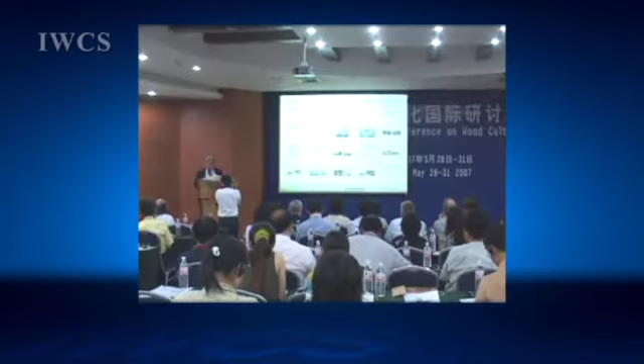It's very important words. My presentation is wood engineering in Japan, past and future. One concept is wood and forest in environmental protection and resources cycle. This is a very important concept for my presentation.

One is how to protect the environment, especially the global environment, now with the greenhouse effect and so on. Another one is renewable resources, meaning sustainable development.

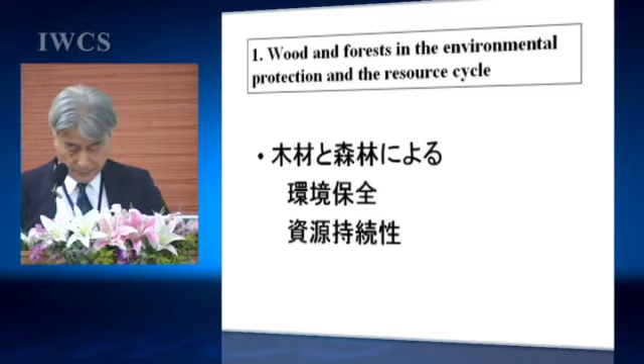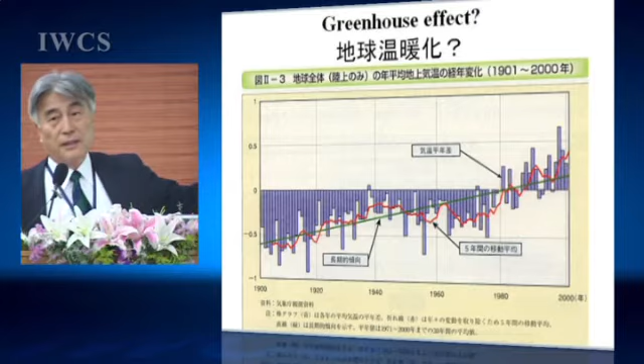Two points are very important. One is, as you know, the greenhouse effect, like this - the temperature on Earth is going up, meaning increasing carbon dioxide. Another important word is decreasing energy resources in the earth.

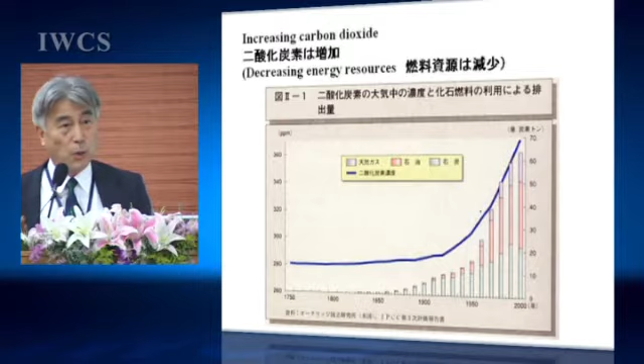So we have three benefits by using wood. One is the carbon storage effect - in forests, in buildings, wooden buildings store carbon. That is forest in the cities - timber structures in cities are urban forests.

The second one, energy conservation effect - timber requires significantly less manufacturing energy, very few, sometimes 10 times or 20 times, sometimes 100 times less. Other materials use a lot of energy. The third one is the alternative energy effect - as you know, timber can be used as fuel, incineration of material. So we have 3 effects, 3 benefits from using wood and timber.

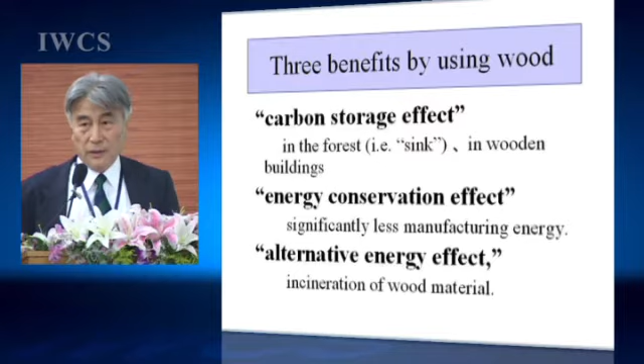Another important point is carbon stock. Timber includes carbon - photosynthesis creates carbon stock. So if we use timber structures, the stock is bigger than the carbon release.

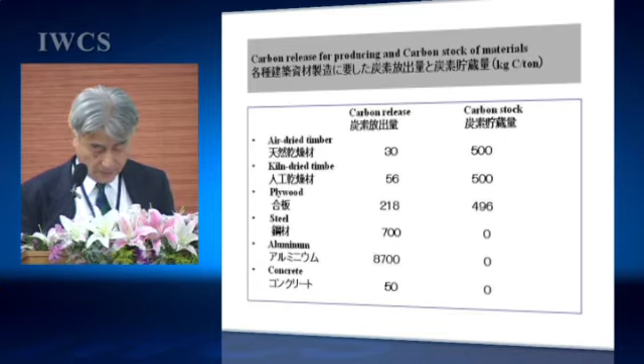This means another forest in urban areas. After demolishing houses, this carbon stock can be used for fuel, sometimes as materials for particle board and fiber board and so on. That is a very important factor. Using wood leads to producing resources - we use forest timber, cut it, build houses or furniture, then demolish, recycle, and finally burn it back to the forest.

But in the forest, new trees get sunshine to become newly renewable resources. Other materials, like steel or minerals, only release - they don't regenerate.

So we say this circle is a very large circle - meaning producing resources, including producing resources. Recycling is also very important, but in a recycling system there's no new production of resources. This is a very important difference between timber and other materials.

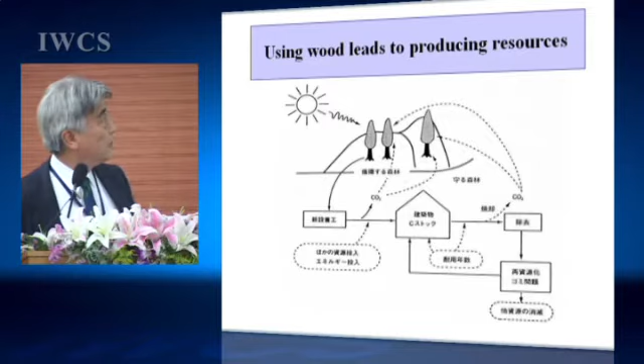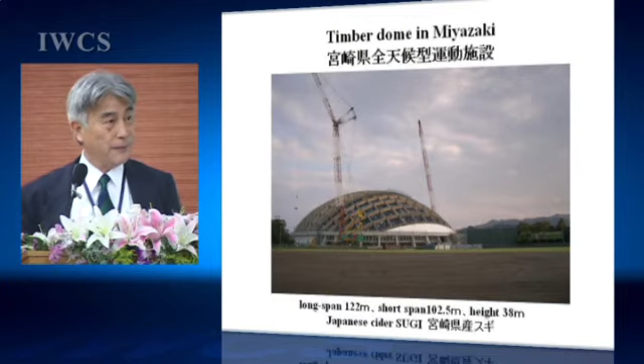This is made of timber structure. The specific gravity of the wood is about 0.35 - very light. This timber dome used lamina, about 2,000 cubic meters. It stocks carbon, about 233 tons of carbon.

Using the energies, if we use this timber structure compared to a steel structure - I think this uses about half the energy of a steel structure. In this dome, this position, this joint, is made of steel, and this one is glulam. If it were a steel construction of the same weight, maybe 10 times the energy would be used.

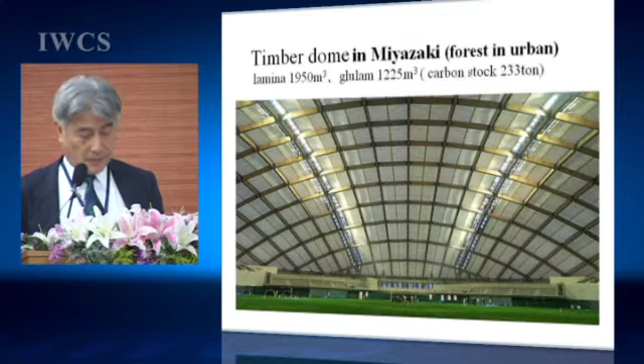So this one is 10, if steel construction would be 10 and 10 - so that is half. It's half the energy used.

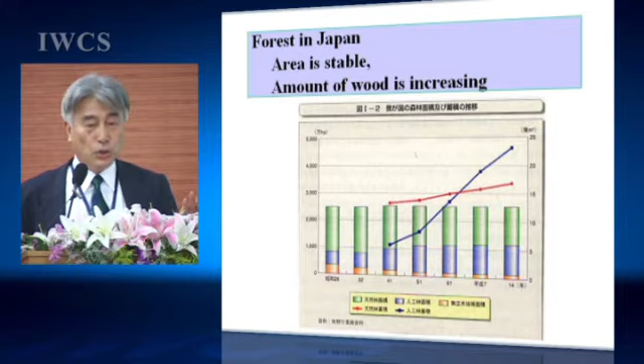Very changeable. So at that time when I was a student, it was not so suitable to use. Now we can use it; it is suitable to use now. So we have to cut, and renewal is required. That is a very important Japanese forest policy.

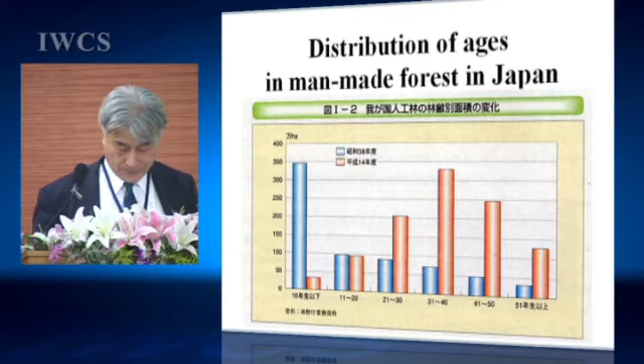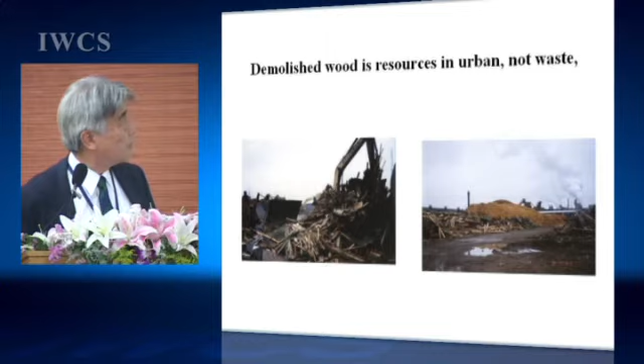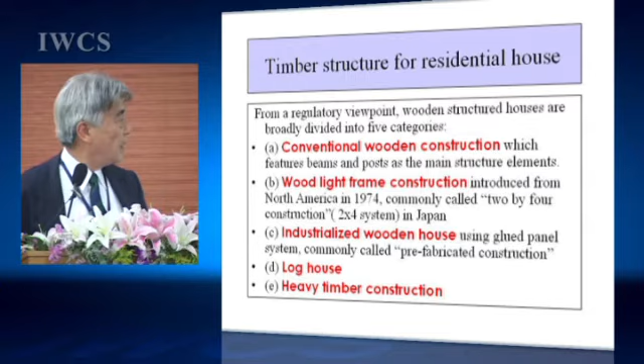So I will show you the Japanese situation with timber structures. In Japan, timber structures for residential houses are like this. We have a lot of timber structures. Conventional wooden construction, and light frame construction introduced in 1974, and industrial wooden houses, log houses and heavy timber construction, like this.

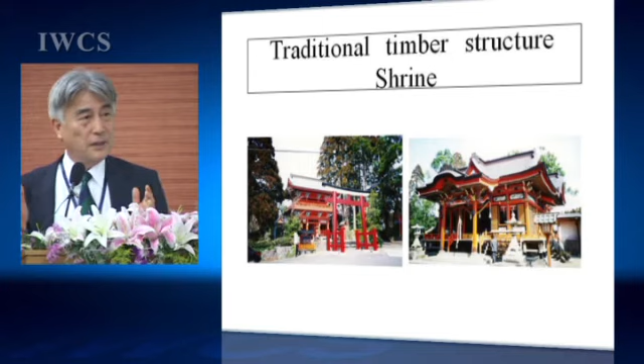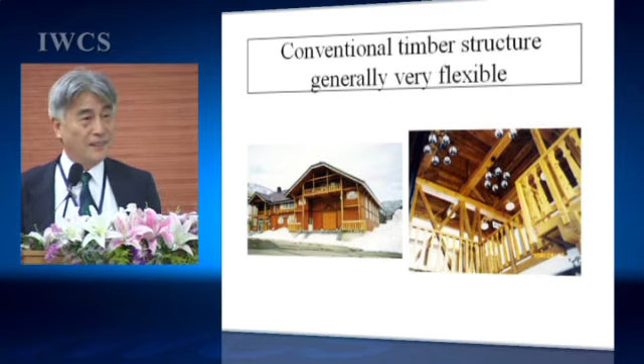This one is very traditional; Shiomatsu Sensei already showed the timber. This one is a traditional timber structure, very different from conventional. Conventional fits the present time very well. Conventional timber structure is generally very flexible. Light frame construction, I can use very easily.

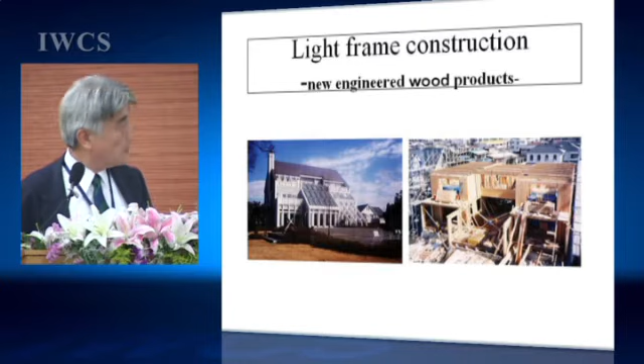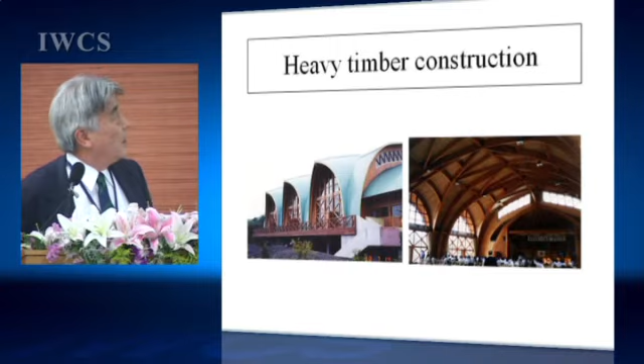Now, I'd like to talk about the current drastic change in wooden buildings and wooden structures. Timber structure has a very, very long history, but I say timber engineering is very important. About 30 years ago is the past for me. One is the impact on timber engineering by research projects.

For example, 30 years ago, I was engaged in the Building Research Institute, a government institute. But at that time there was only one timber engineering researcher, only one. But now there are a lot. At the Architectural Institute of Japan presentations, at that time there were 2 or 3 topics. Now, this year, about 300 topics. Very changed in only 30 years.

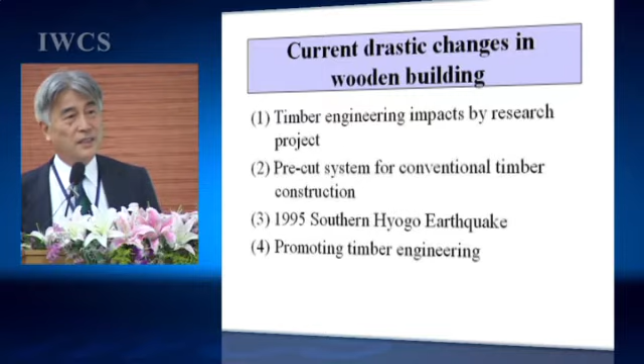And second, the pre-cut system for conventional timber construction is a drastic change. There is a big lack of carpenters, so we have to use machine cutting and so on. And the third one, the 1995 Southern Hyogo earthquake, a big natural disaster. Related research increased very much; the earthquake damage is reflected in the number of researchers, very, very increasing.

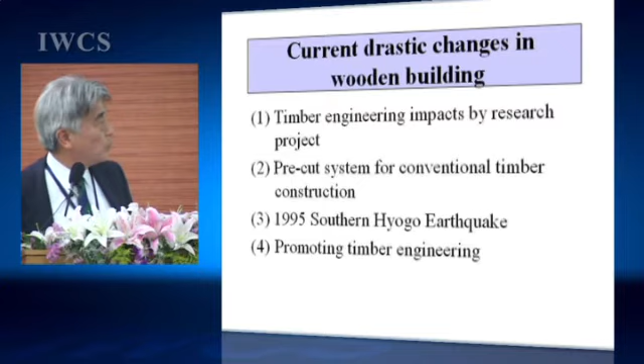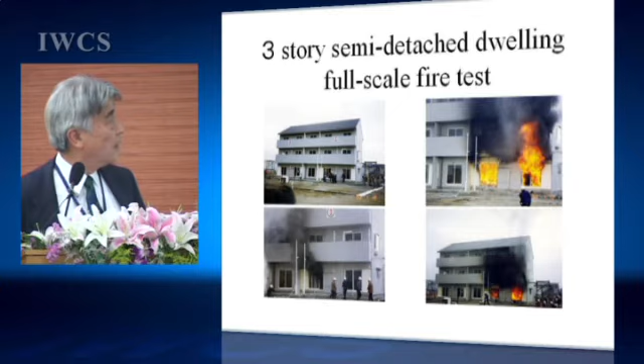And the second one, the pre-cut system for conventional timber construction. This means the machine cutting method for conventional timber structures. The so-called pre-cut system is combined with computer-aided design. That method is very effective. This one is like this, pre-cut conventional houses. This is for carpenters, and this one is industrial houses.

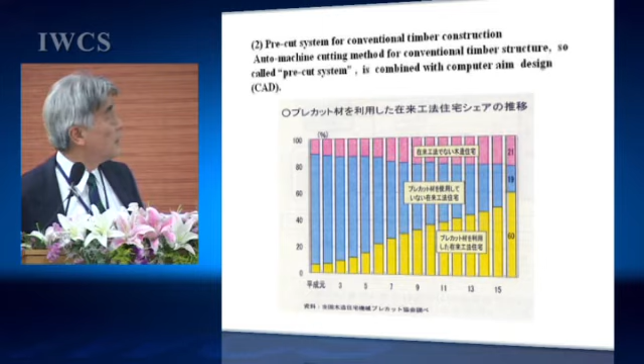This machine cut method is reflected in the selection of building material, very changeable. For example, kiln-dried timbers and glued timbers are required. Conventional timber structure like this.

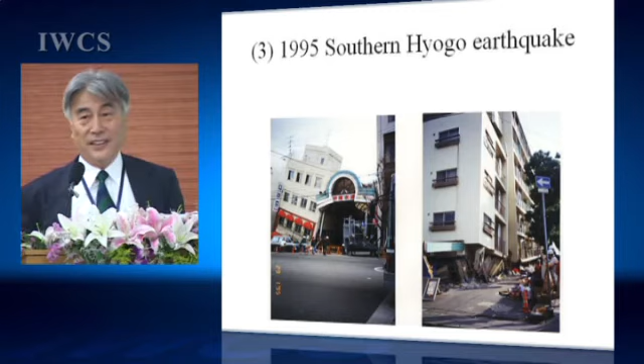It survived the 1995 Southern Hyogo earthquake. I think in China the earthquakes are not so severe. In Japan it's like this. This one is the city hall, and an apartment house like this. From that earthquake we have a lot of instructive announcements, that in the damage results old houses crashed, heavy roofing houses crashed. That is no.

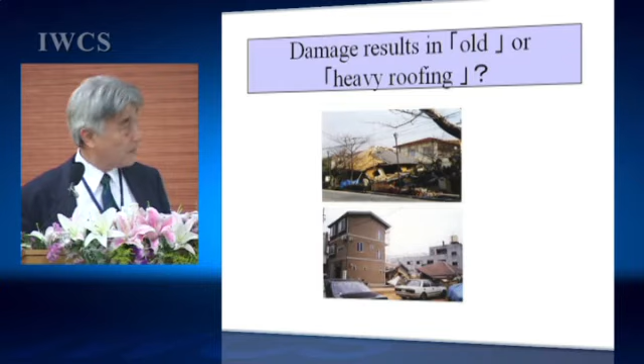Most of the mass media said old ones crashed, heavy roofing is bad. All the mass media said it. From the aspect of timber engineering, it is wrong. The very important thing is this: well designed, well built, well maintained timber housing suffered no damage. This is very important. Well designed, well built, well maintained. This is engineering.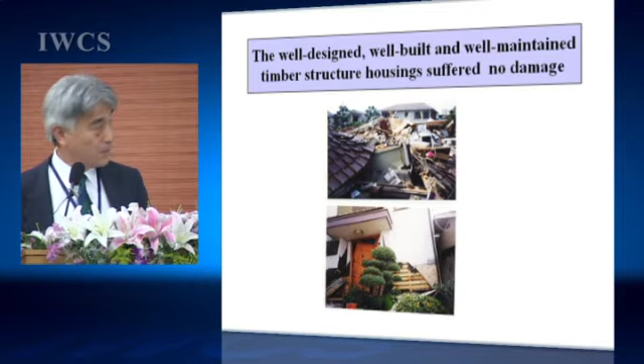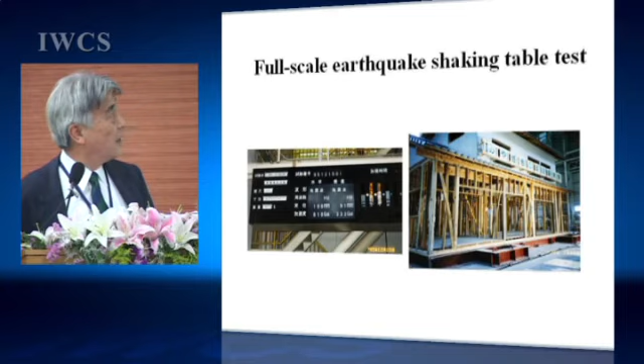Japanese traditional timber structure, like this Horyuji temple: well maintained, well built, well designed. Engineering is very important. So, after the earthquake damage, a lot of full-scale tests on the shaking table, like this. The brace is breaking. And many full-scale tests and element tests, like this element, are carried on now.

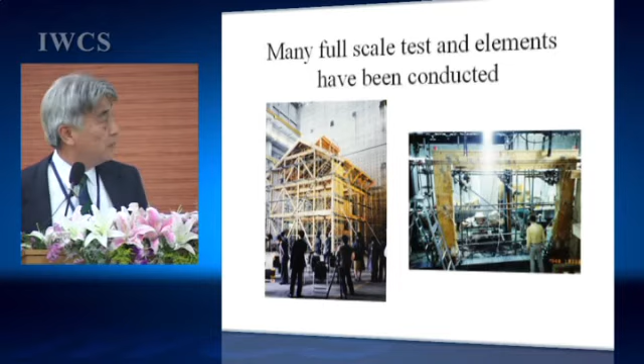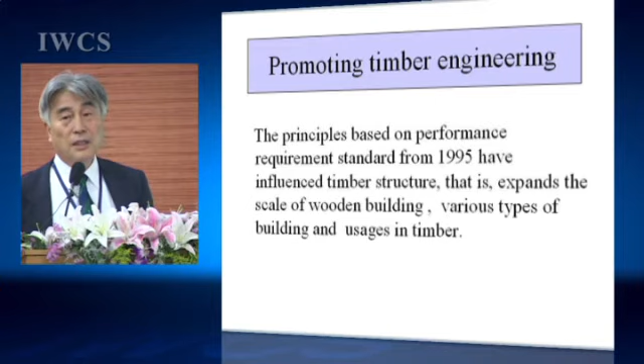So now timber structure in Japan is in progress. Promoting timber engineering is the principle, based on the performance requirement standard from 1995. Different timber structures, that is, expands the scale of wooden buildings, various types of building, and the usage of timber. That means very, very attractive, but very hard to meet the requirement.

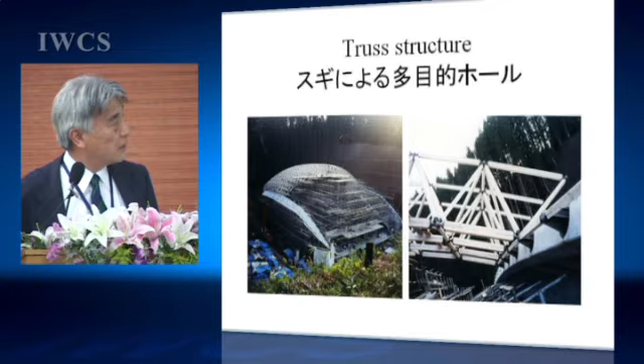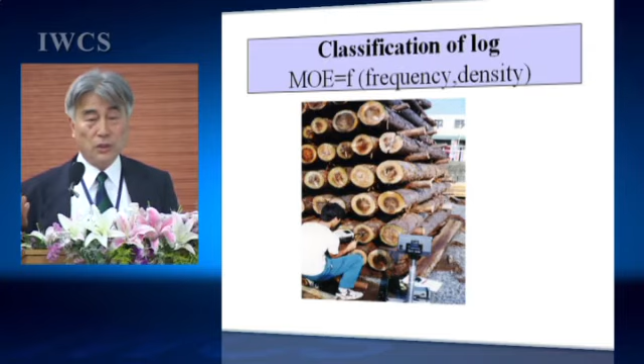And second, especially classification of log and classification of timber from the standard and so on. Classification of log: this one is classification of log by hitting the hammer and measuring frequency. And these logs, how much modulus of elasticity? From the result of modulus of elasticity we have to select how to make a sawn lumber, how to use glulam, lamina, or so on.

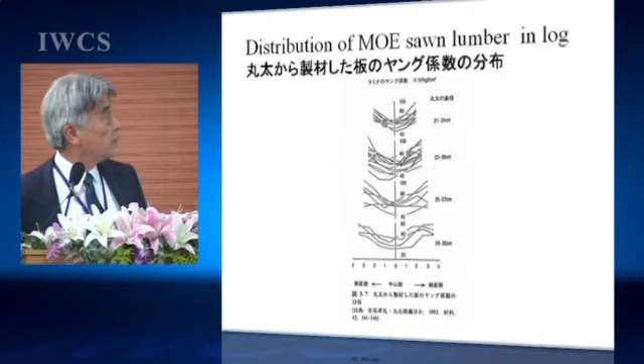For example, this one is the distribution of modulus of sawn lumber in a log, outside and in the pith part, like this, in Japanese cedar. So the sawing method is very changeable, how to use, how to glulam. And very, very fundamental data is very important. Large scale span, large scale dome, and so on.

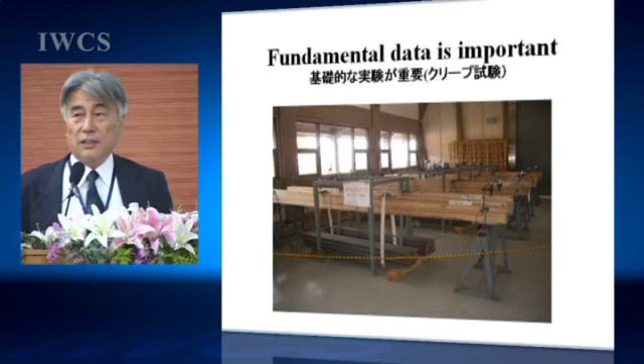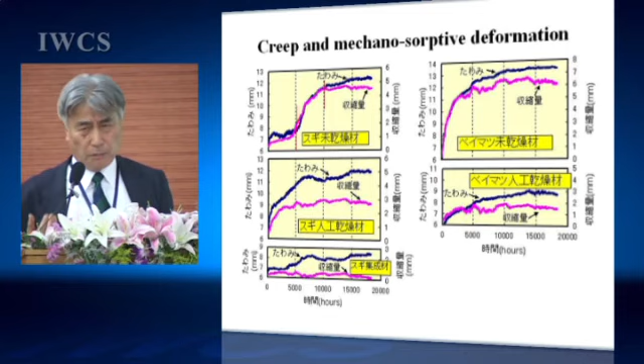Like this one, the mechano-sorptive effect. Drying method is very important. If we use green wood, like this, so the drying method is now improved. Time-dependent behavior is very important. Such a large span building is very, very dangerous if we don't know the time-dependent behavior; it is a very, very severe condition.

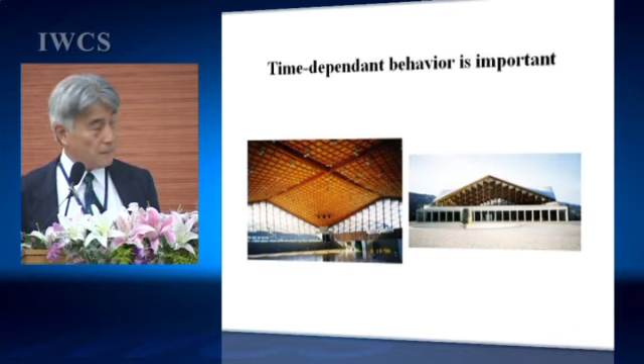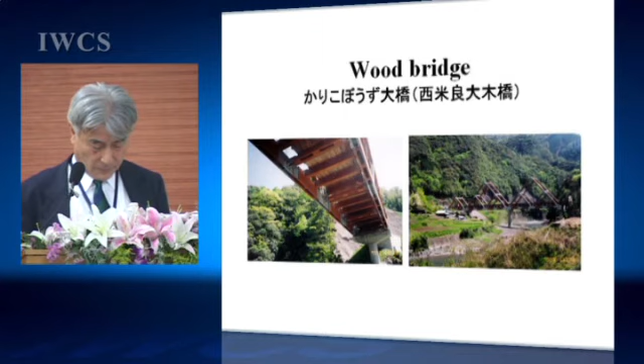And this one is a wood bridge. This wood bridge is made of Japanese cedar, also the same. Like this. 140 meters. And the glulam used logs of 4,100 cubic meters. This one is forestry of about 10 hectares. Its stock of carbon is 250 tons. This project is very important, in fact a very important one.

Most people who visit here ask how long will it be left? That is, what you say in Japanese, not such a good question to answer. This project is very important: how to maintain, how to rebuild, how to repair.

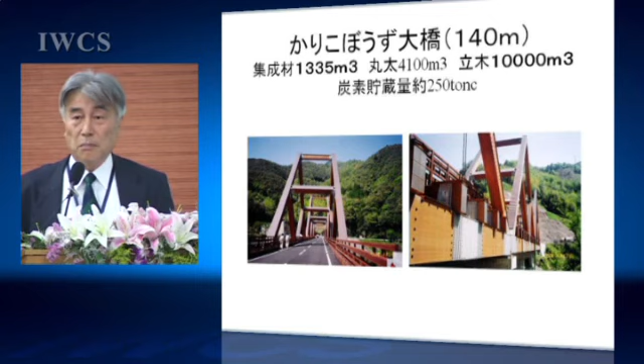To get such a result, we need cooperation. A lot of people's cooperation is needed. For example, this village is a very, very small village. The daily aspect is very, very important. And for our laboratory, two measurements per year. Manufacture is required, and a maintenance method is required, and so on. Yes, this one is the same concept, I think, but a material difference. We have to transfer our engineering and concept to the next generation.

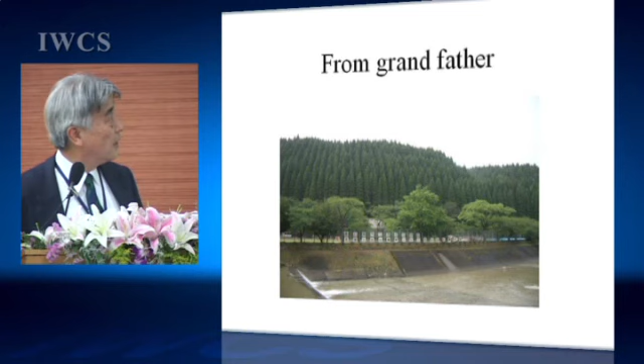And the last one, this forest is a very, very common scenery in the prefecture. Maybe the grandfather planted this Japanese cedar, and the grandson cut this forest. This was already planted here, like this. The owner of this forest is me. Saturday and Sunday mornings I cut the grass, and for my grandson I work hard. A 103-year-old Japanese cedar tree like this. We have to start. How to use.

So, conclusion. My presentation is more forests, more trees, more timber, but the very important thing is appropriate use: how to use, how to maintain, how to plant. That is very important.